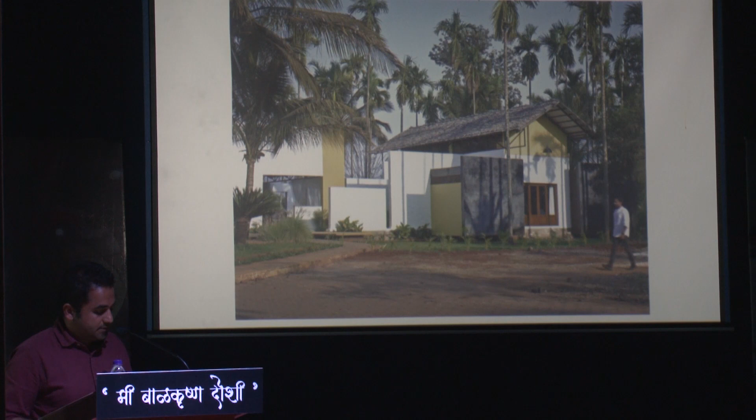The Desur house. The site, buffered by arecanut trees and sugarcane fields, harbors a weekend home that grows between what existed on the site. No trees were cut to accommodate the build. A part of the new design has sprung out of the plinth and walls of an existing old farmhouse that was already existing at the site and then was partly demolished to set in a new design language.

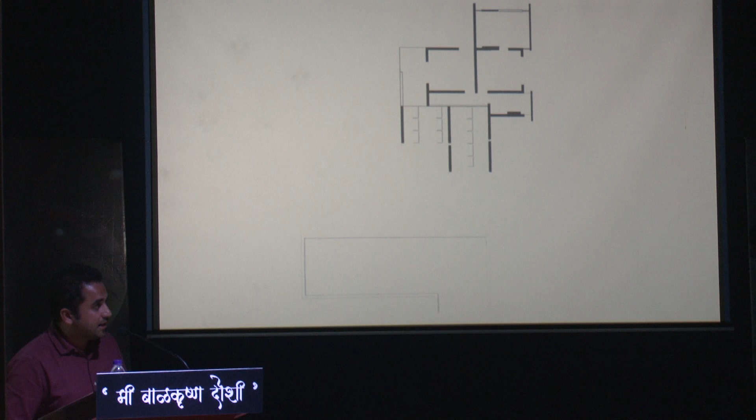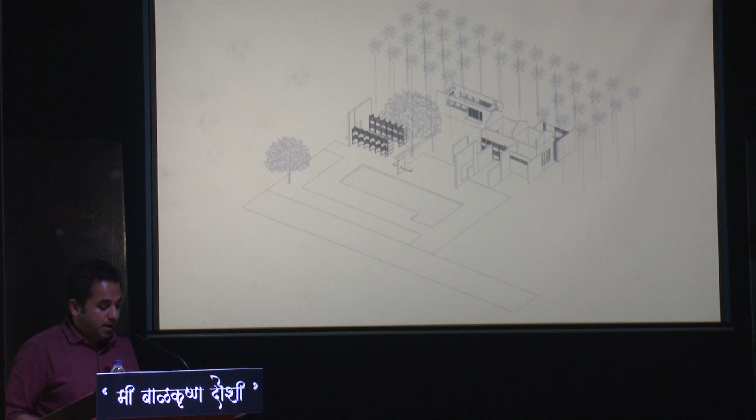Though the overall floor plan is choreographed in pure geometric spaces, the intent is to achieve a non-linear movement for the user. A set of rectangle floor plates are positioned as dining and living pavilions under a single roof form on either sides of an existing mango tree. A bar counter and a swing protrude out of the central beam, creating divisions between the living and the dining. All of this is mirrored in the black basalt pool.

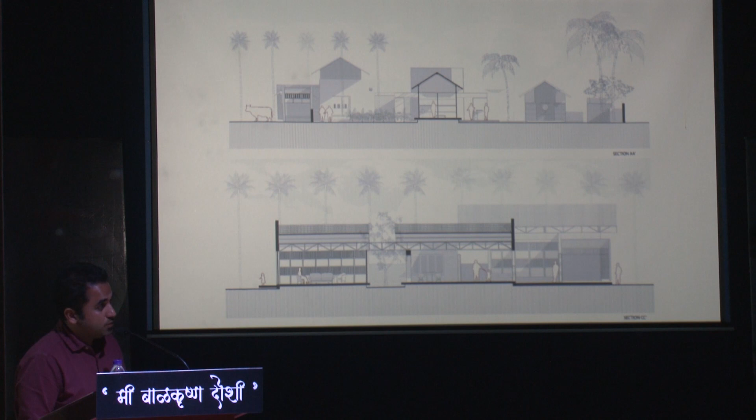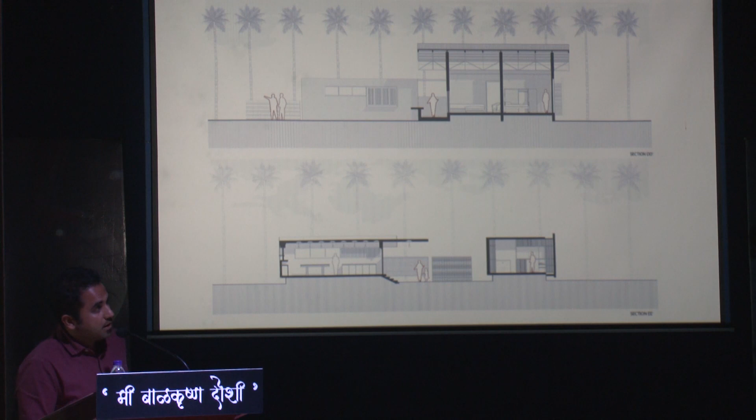A series of rectangle parallel walls are juxtaposed to form small courtyards that act as wide thresholds between the living areas and the bedroom areas. The occupants are transferred into a more restful region of the built form, which holds the bed, bath, and the toilet areas. Yet, this shift retains connections with the outdoors, as one can directly step out from every built space. The bedrooms have more defined corners in contrast to the less contained planning concept of the living spaces, giving qualities of privacy and security. The sudden change of spatial quality between the bedrooms and the courtyards is arbitrated by a screen passageway. All of this portion of the built form is built on the plinth of the old house.

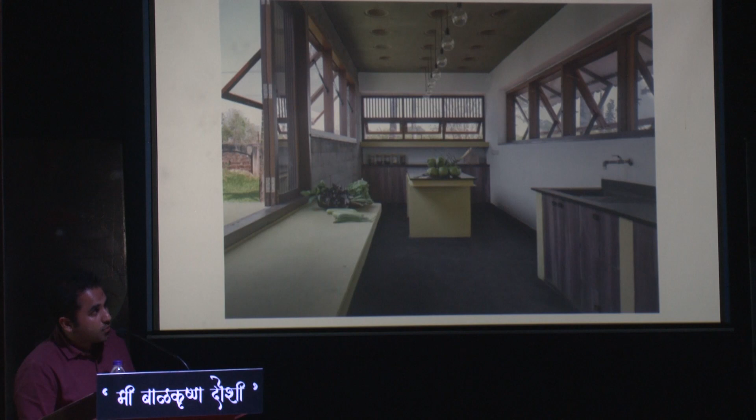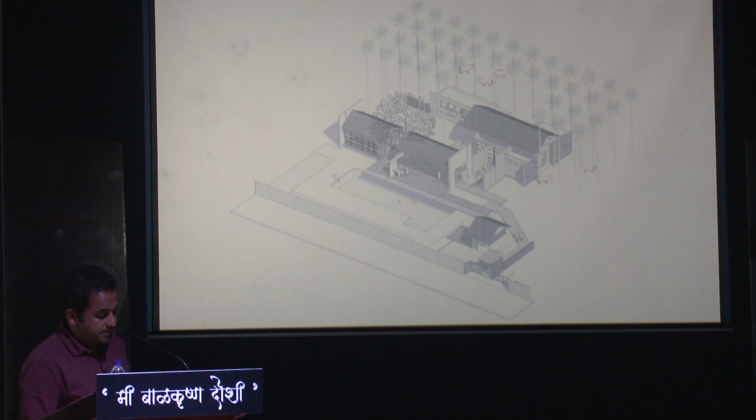Lastly, the kitchen block is designed with its independent filler slab. Placed in isolation, it has a community character than a pure domestic-driven kitchen. The kitchen has a direct dialogue with a courtyard garden in the front and a kitchen garden at the rear. Inspired from vernacular homes, it aims to recall this through colors, textures, materials, and spatial qualities. The wire-cut bricks, unplastered concrete filler slabs, kadapa flooring, black and yellow oxide treatments give it a vernacular home-like feel. The black basalt swimming pool is influenced by the basalt wells and ghats, vernacular to the architecture of Deccan Plateau.

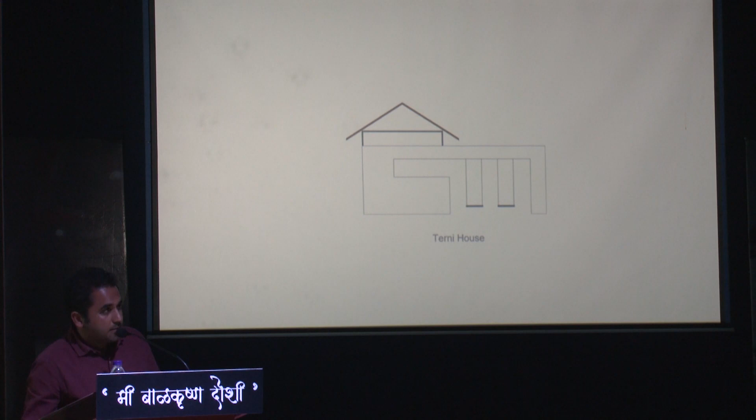Next, we have the Temi house. Like all village homes of this region, this piece of built form is basically divided into three parts. I won't get into the detailed plans, it's more of a narrative. One, dedicated to the daytime activities such as lounging, eating, cooking, and entertaining. A second space flanking along the swimming pool holds the bath and the restrooms. Lastly, an elevated space positioned right across these spaces holds a space for a good night's sleep.

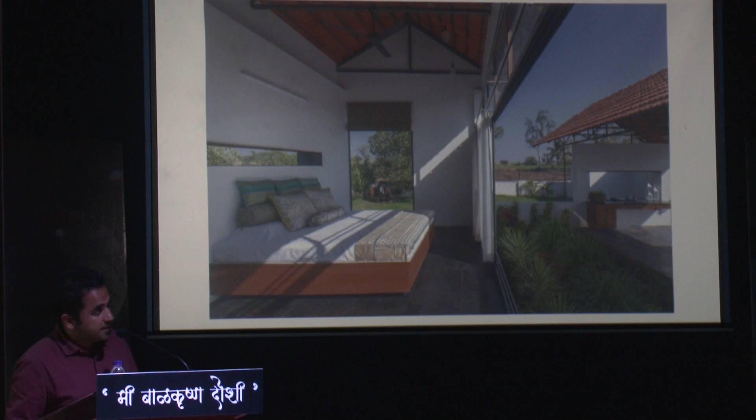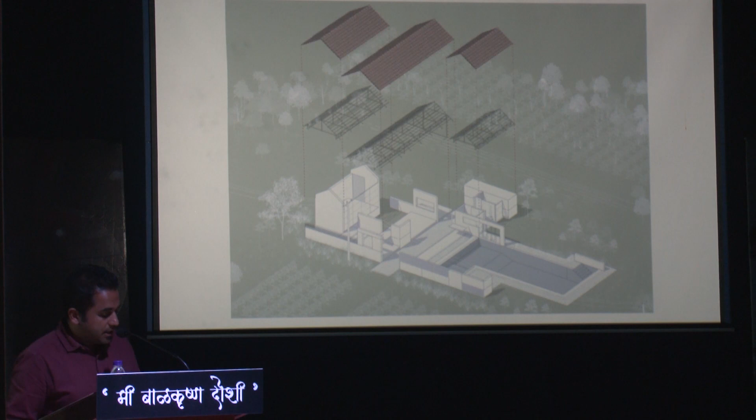Unlike a typical village home sheltered under a single gable roof, each of this space is sheltered by its own independent gable roof. Thus, the achieved image of the roof's silhouette reminds one of the neighboring village settlements.

These three units are spaced apart from each other such that the cantilevered gable ends of each roof slope down into the buffer areas that form softscapes and hardscape courts.

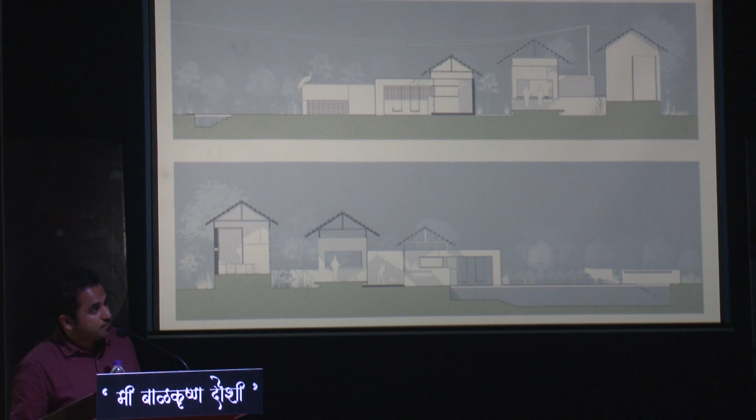The plinths and roofs of these three built spaces cascade down step by step towards the east, allowing all the spaces to enjoy the view of the swimming pool and the farmlands across, adding advantages of blocking the harsh south and west glare and directing the users towards more softer light of the north and the east.

The impact of this place was to set a different pace for its user, where they could get absorbed with the calmness and openness of the farm life. The immediate farms across this built space changed character seasonally, from being barren lands to being tall gardens of sugarcane fields.

Next, we have the Tulsigiri house. This is located around 20 kilometers from Bagalkot.

Nestled quietly amongst fields of sugarcane, this Bagalkot farmhouse draws inspiration from courtyard homes of North Karnataka. No stranger to its surroundings, this contemporary piece of architecture appears rooted comfortably in its place. A selection of warm colors and a style philosophy which bows to that of contemporary lines along with vernacular material palettes makes this farmhouse rather functional.

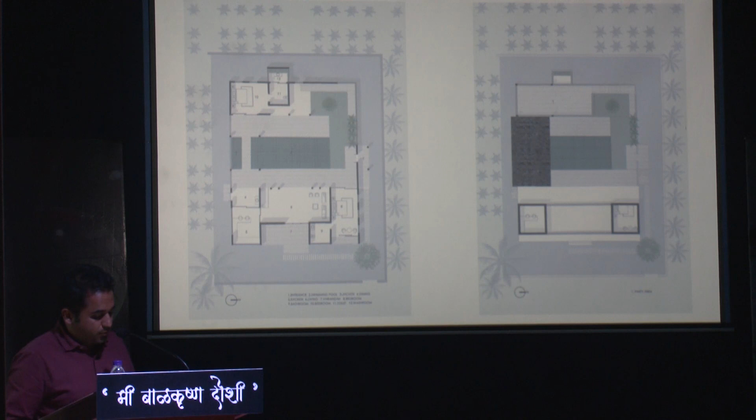The floor plan is developed with basic principles of Vastu. The house is fortified within the four corners of the built form, with a swimming pool taking the center stage under the central open-to-sky courtyard.

As with the rest of the farmhouse, the roofs and the walls are a nod to the local environment. Earthen clay roof pot tiles are unique in most contexts, but here it is as beautiful as it is common. As homage to the surrounding villages, these pot tiles undergo a process of natural charring that results in each pot tile having a distinct color, from grey, hazel, soot, to sand.

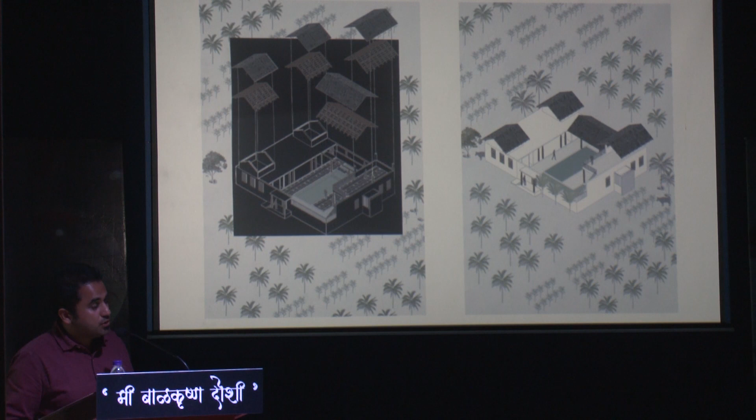These four roofs individually peak at different heights, mimicking the architecture of the neighborhood and creating a feel of community, as the roofs of a nearby village would. As for the walls, they are simply plastered white to mimic the rural lime plaster stucco.

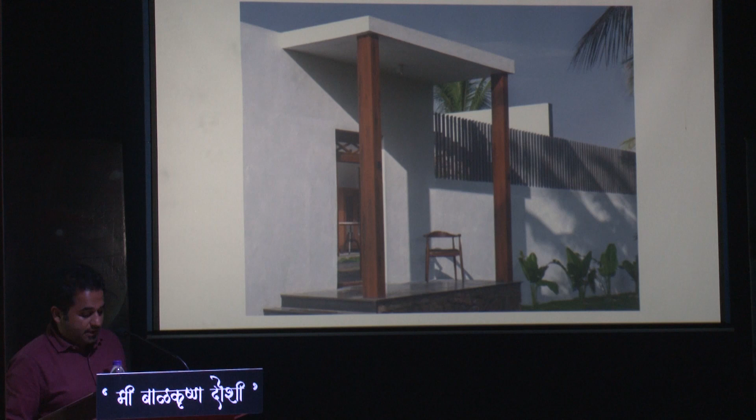The upper half of the periphery wall was dressed in numerous vertically placed slabs of kadapa, each at a degree of 45. This not only builds the character of the house, but also adds a method of ventilation while also adding a layer of privacy.

Further, this material is carried into most of the outdoor flooring. The same kadapa has been used, leather finished and laid out in a herringbone pattern. Shade spaces lead into each other effortlessly, encouraging a journey through the farmhouse, all while soaking in glimpses of the swimming pool.

References to South Indian royalty are seen in the interior tiling. Rich jade green shaded Athangudi tiles, which we got specially made from Athangudi in Tamil Nadu, are used for the shared spaces as well as the private spaces.

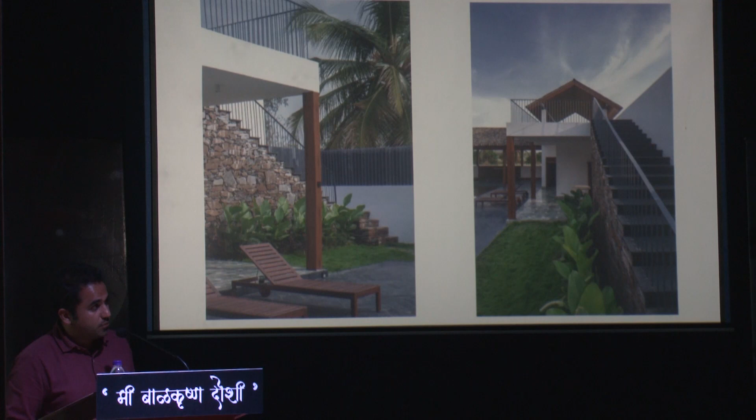Yet another key characteristic of the farmhouse is the use of random rubble masonry through parts of the exterior compound wall, and this has also been brought into the property to complement the backsplash wall of the jacuzzi and the feature staircase wall. These heavy stones were sourced locally, tying a tighter knot with the house and its surroundings.

All things considered, this Bagalkot farmhouse encompasses all that is required to make a beautiful home, with architecture that's in line with the client's first and foremost demand: an ode to the courtyard homes of the South. This is what we as architects have delivered, by crafting a midway between contemporary and vernacular schools of thought, with the design through choice of materials, forms, and spatial qualities.

In the quietude of tall grass stands solace, the Tulsigiri house.

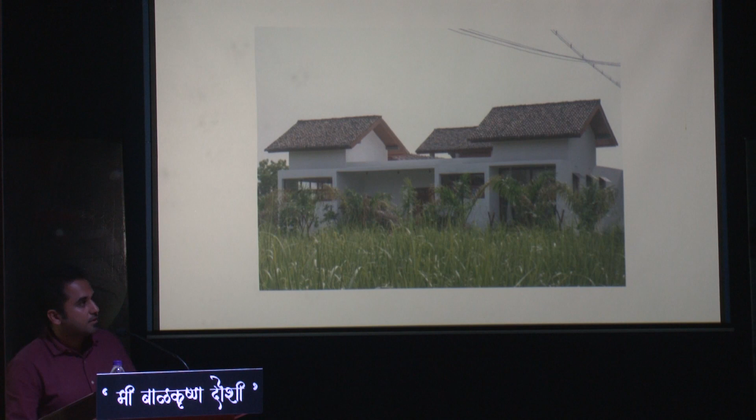Next, almost about 2 years ago, we came across a client in Bangalore who not only had us give a proposal for his residential design, but also got us another client, both in the neighborhood of Indiranagar, Bangalore. With no residential projects ever conceived by us, for all good reasons, the clients decided to hire us.

These two residences were incepted and completed at the same time. The alter ego of both the clients had one rule in common: no element of design between the two houses should be the same. So we fondly call these two houses the fraternal twins.

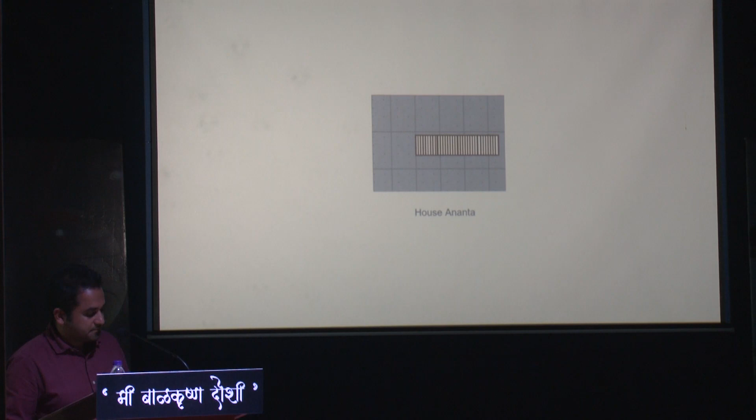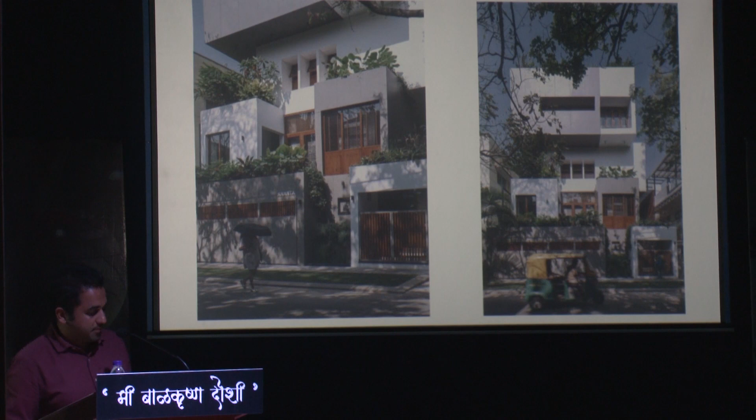House Ananta. Locked within its vastness and exalting bulk, soft brutalism calls to cubic architecture. This is House Ananta, a mass of laborious thought and inclusive design. Every aspect of this home has been created to maximize the interplay between light, forms, and pockets of green, a testament to the progress of garden-friendly residential design.

An assembly of cubes is organized in cantilevers and recesses that makes up the elevation of the residence. This give and take of exposed concrete, warm teak accents, and lush green foliage on the facades creates a captivating dialogue between the built environment and nature.

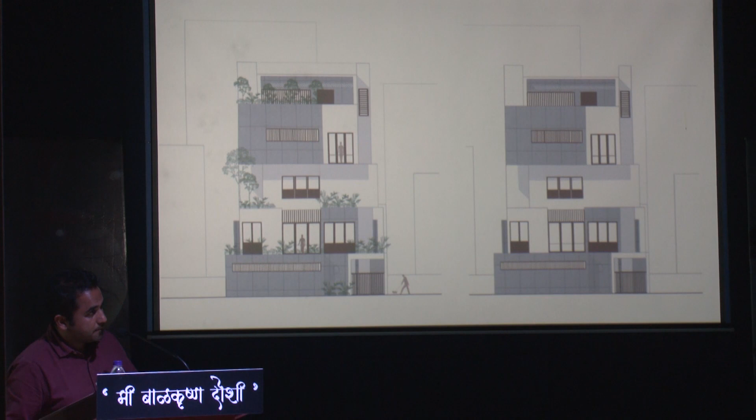The elevation almost narrates the metaphor of a stretched arm out to the park ahead. In fact, the client specifically bought this site because it faced a park ahead. It was a 40 by 60 site, and the main idea behind building this house was that he already has a house in the next lane, but that house didn't have gardens.

This new house was also 40 by 60, but again he wanted a lot of gardens. So we had no other space, because he had a list of royal programs that needed to be fitted into the built form.

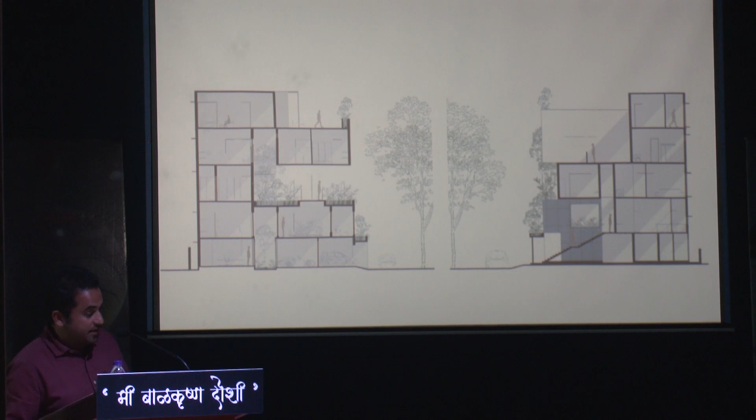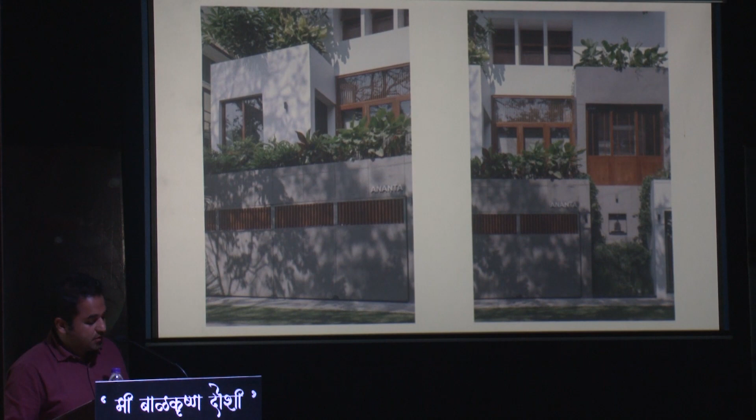So we had pockets of green that cascade all over the elevation of the house. These leafy pockets soften the sharp geometry of the building. The volumes are either finished in neo-cement concrete, painted white, or teak fenestrations. The facade calls for its visitor to stand and stare, a moment's pause before entrance.

I won't get into the detail of all the floor plans, but we'll just quickly brush through them. The house is built on a site measuring 40 feet by 60 feet, with amenities of a modern bungalow. The stilt floor accommodates the car parks, servant quarters, and a home office. An arrangement of a dog-leg staircase and a mechanical lift connects the house vertically.

The raised ground floor accommodates the living, dining, kitchen, guest bedroom, and an outdoor sit-out that constitutes the making of the elevation. The three bedrooms and walk-in wardrobes with their attached bathrooms are on the floors above, with a separate family room on the first floor and a home theater on the terrace on the second floor.

The garage is kept hidden behind a fortress of concrete and the warmth of wood. Facing the fleet of cars, the home office is trimmed in Rosso Corsa, an ode to the clan's prancing horse.

We'll just run through some of the interiors of this project.

In the heart of Bangalore's action, the cacophony of city life fades into a distant murmur. This is one of the views from the terrace looking down onto the street, where you see all the gardens on the east.

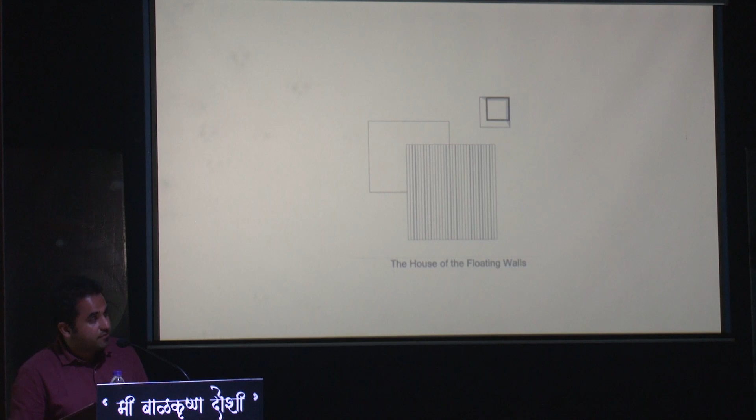Next, we have the house of the floating walls. In an age of architecture where minimalism isn't unfounded, the house of the floating walls solidifies its place amongst the rest. Shapes, spaces, forms are playfully painted upon a blank canvas, breathing life into this building.

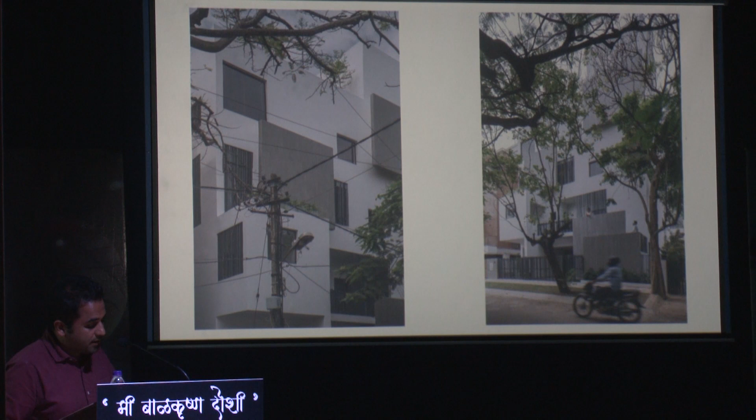The floating walls are crafted using varying patterns of vertical strokes. They mimic exposed concrete, while they are actually made out of thin-cut vitrified tiles with intricate workmanship. These, along with the fabricated louvers of assorted metal profiles, add to the minimalist composition of arrangement.

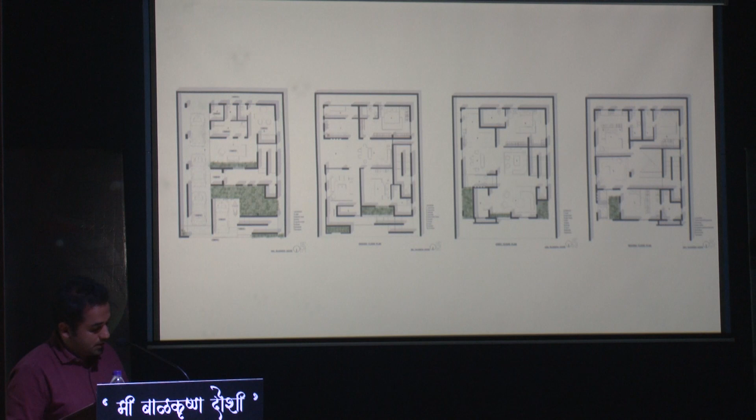The house is again built on a site measuring 40 feet by 60 feet. A 2BHK residence for rental accommodates itself on the ground floor. The ground floor is actually a 2BHK rental that the client has designed in a specific way.

He asked us to design another dog-leg staircase that would be accessed directly from the main road, without anyone entering the car park and the home office area for himself. The stilt floor is shared by the units, with amenities such as parking, servant quarters, and other services.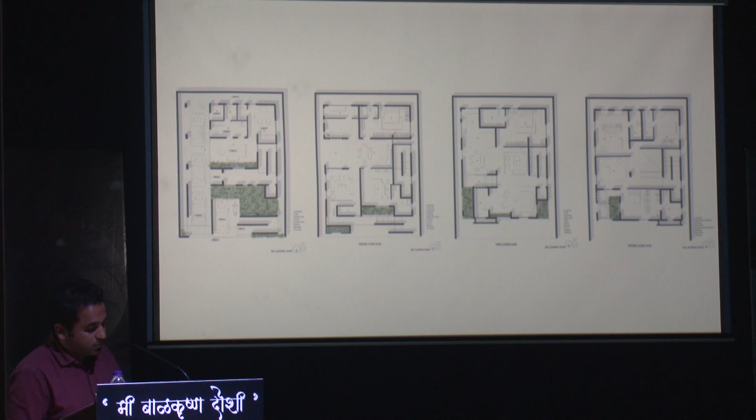The facade disguises a ground floor rental space, while the main house sits atop it. The entry to the rental residence is tucked behind these floating walls. A separate staircase and a lift connects the owners to the house above.

The house above is a duplex with a living room adjacent to a double-height family room, and an open dining kitchen and a master bedroom. The other three bedrooms are on the floors above.

Here are some of the interior images.

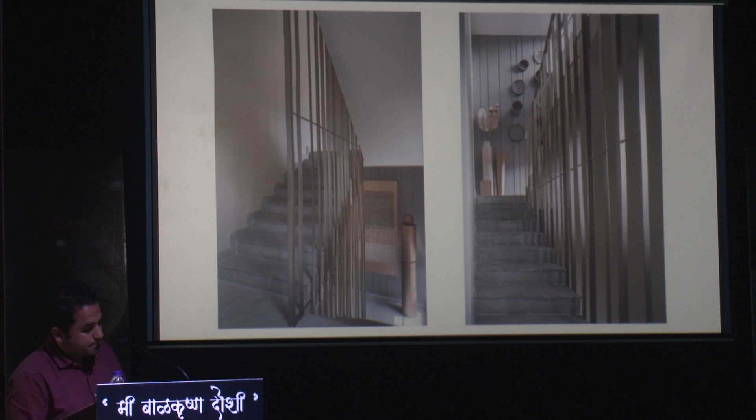Here in the house of the floating walls, more or less is more.

Back at our studio, we aim to integrate contemporary design forms with climate-responsive strategies. We indulge in celebrating our spaces with relevant colors, juxtaposed with a play of light and shadow that reflects the energy of an emerging young practice. Taking inspiration from Corbusier's quote, 'Color is an incredibly effective triggering tool. Color is the factor of our existence,' for our next two projects, we took liberties of overdosing the architecture with colors.

Here are two pre-primary school buildings located at Gokak and Nippani: the KLE Sanskriti Pre-Primary School at Gokak. Sanskriti School is an exclusive pre-primary school for an already existing school campus at Gokak.

The planning is directed by considering the psychological and physical needs of kindergarten kids who have tendencies of exploring spaces that have exciting avenues and colorful vistas with minimum boundaries. Their view of the outside world is repeatedly framed with circular windows.

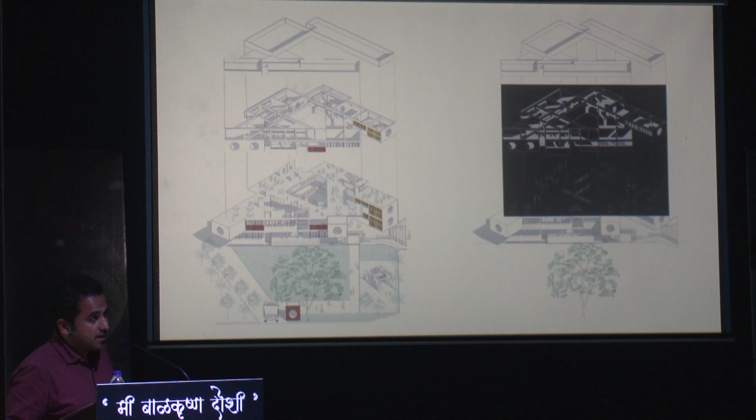A triangular shaped piece of land sandwiched between an existing school building on the north, a set of playgrounds on the east and west, and the campus property edge on the south was identified as the location of the new pre-primary school building. This new building would eventually craft the elevation of the entire campus as it stands in the foreground of the existing buildings, creating an avant-garde image for a school premises in the city of Gokak.

A semi-underground floor holds a large gathering space used as a dining hall, a kitchen and a store, and a large hand wash area.

The ground floor accommodates the center head and 3 nursery classrooms on the north. 4 LKG classrooms on the north and the northwest, and an activity room on the south, are part of the first floor.

Subsequently, 4 UKG classrooms and activity rooms on the south, with classrooms still positioned on the north, are part of the second floor. A vertical shaft with separate toilets for girls and boys runs through all the floors of the building.

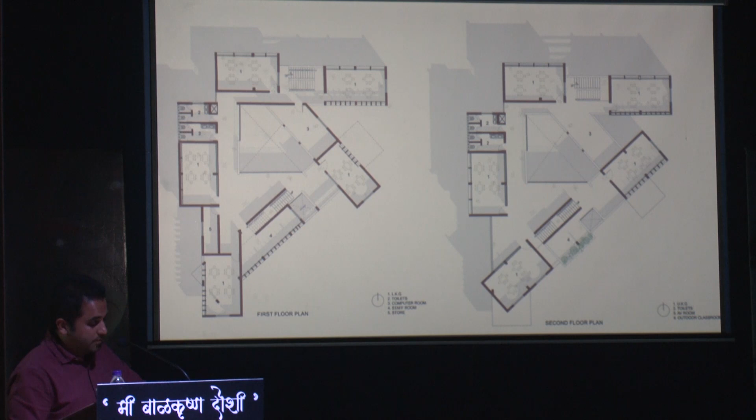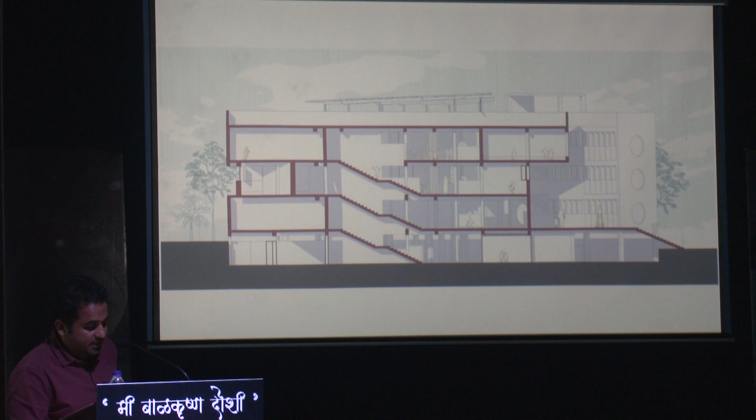For a pre-primary school, interesting attempts have been made through architectural methodologies to support various programs such as formal education, cultural events, and sports activities through all 4 levels of the built environment. Each activity has designated areas and is overlooked by the others through double-height courts, corridors, and window openings.

Certain climatic conditions play a key role for this building in Gokak, being a warm and arid city. The north, northeast, and northwest sides have been chosen to accommodate all the classrooms, such that their openings are free from the harsh glare.

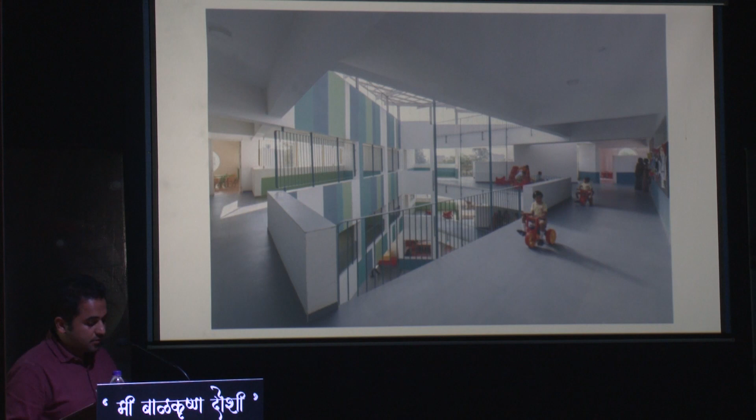All the activity spaces, the corridors, staircases, the admin room, the staff room, and the activity rooms are all placed on the south with brise soleils that buffer the vehicular traffic and the summer heat. A triple height court formed by the crossing of these spaces generates an effective stack effect that helps cool the temperatures, reducing the need for artificial cooling.

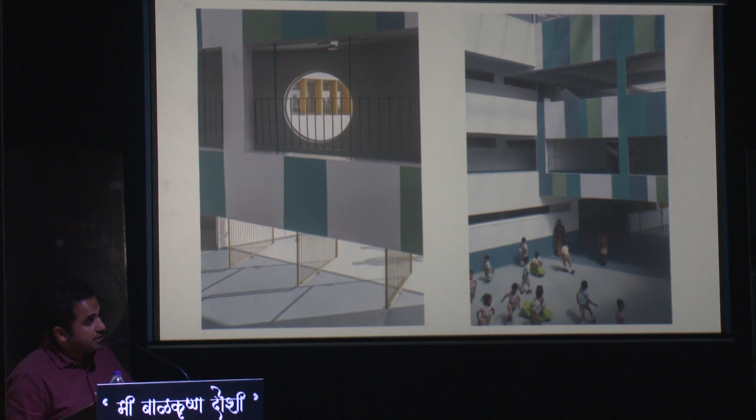The plinth level of the school is contoured according to the site context. A direct entry from the south is the primary entrance to the atrium and the basement below. An amphitheater on the east facing the playground acts as another stairway entry leading upwards, with a ramp running parallel to assist the disabled.

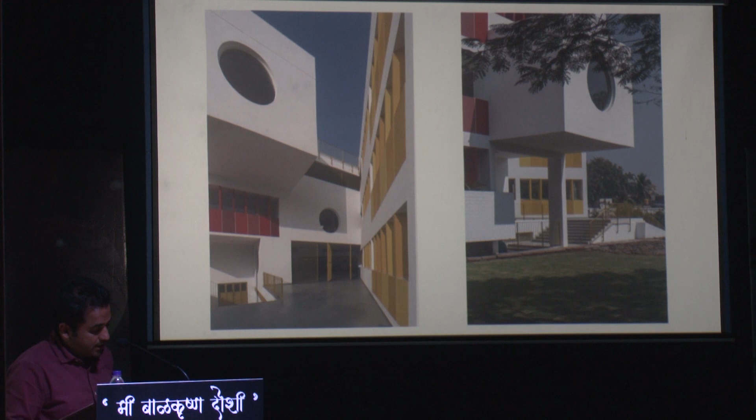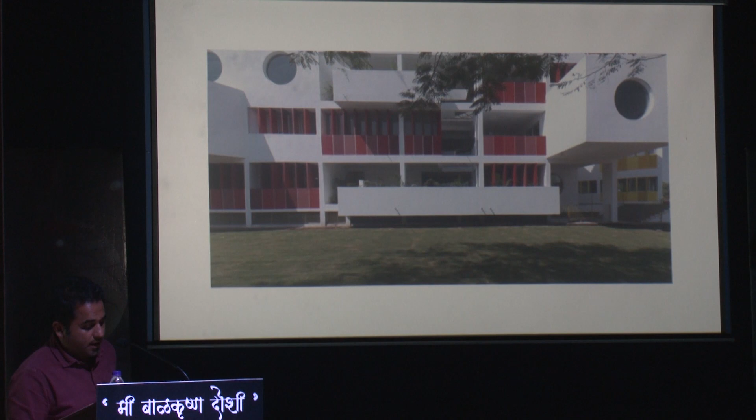The architectural language of openness, continuity, security, vibrancy, and unity is choreographed throughout by the positioning of courtyards, classrooms, and double-height spaces which connect the students across all grades. The circular windows and the colorful brise soleils in shades of yellow are a metaphor to the childlike and energetic nature of the kindergarten kids.

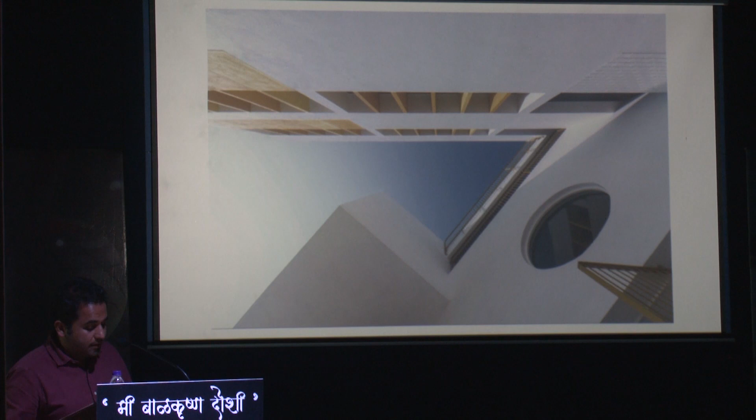This celebration of architectural features runs in and out of the building, framing the indoors and outdoors through these fancy fenestrations. The massing of the built form is blossomed by stacking rows of classrooms within the 3 sides of the plot.

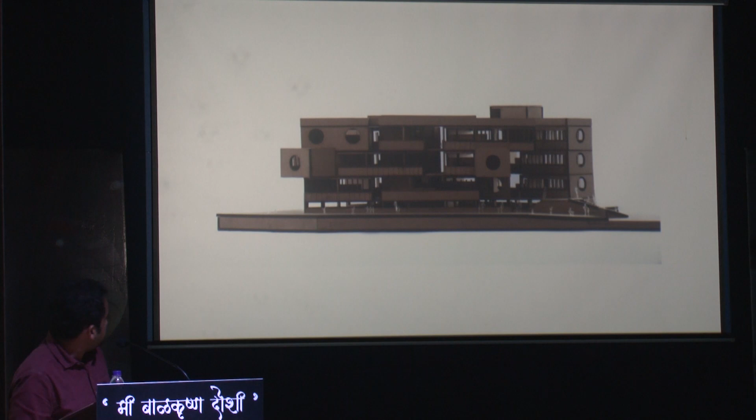This is a model that we completed after the design was approved for construction.

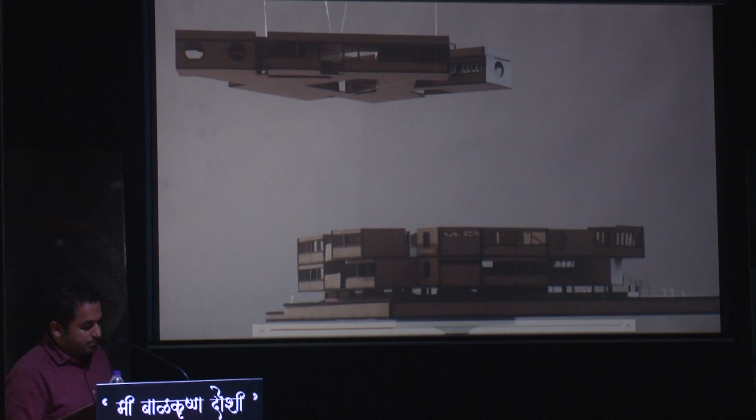With a rhythmic twist and turn of these blocks, a volume of cubes jutting out at perpendicular and angular degrees assists in creating a simple yet powerful architectural volume.

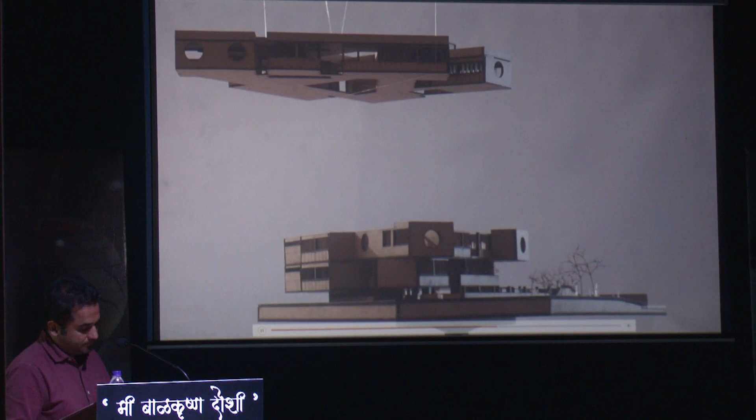Next, we have the Nipani school. This is also a pre-primary school.

A square with a triangular top hat does make a home. A similar approach has been taken in sketching this school. Built like a toy house, the massing has been designed with certain innocence in its rather rudimentary shapes. Forms of playful construction in projected cantilevers make the elevation of the school block.

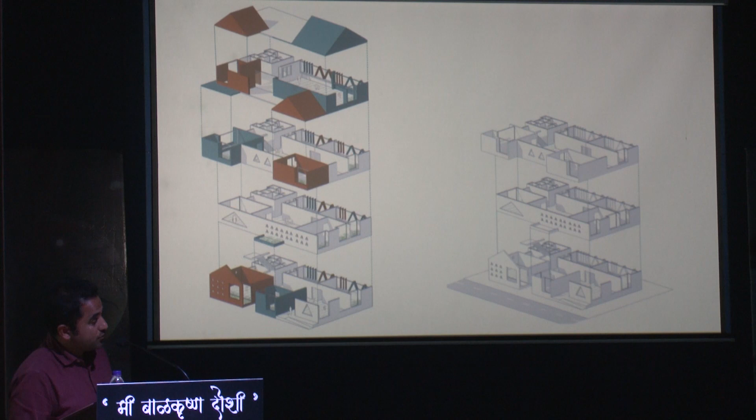A dual entrance on the south - there's one here and there's another one there - allows for the movement of the usual traffic, while a sloped entrance leads directly into the playgroup area. Both accesses are monitored by the centrally positioned principal's cabin.

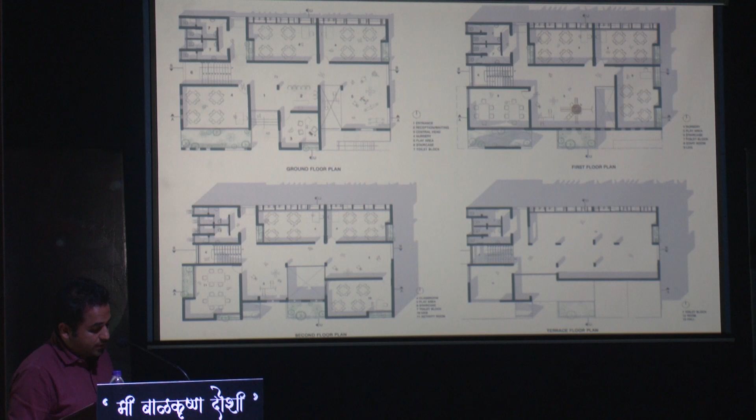Each floor hosts 3 classrooms, an activity room, and separate washrooms. The nursery activity room is fitted with a floor-to-ceiling window casement to maximize natural illumination of the volume. A shaded court across this space encourages learning amidst nature.

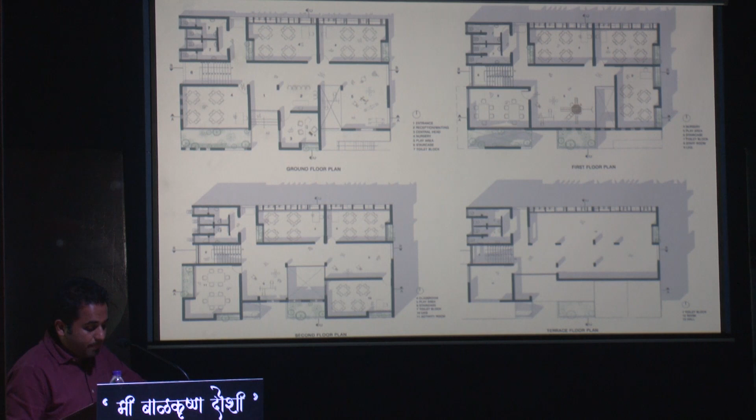Additional play areas on each floor ensure that students are constantly engaging with their cognition, while also continuously developing physical, emotional, and social well-being.

A space designed by the drive of climate responsiveness is again a very essential criteria, made possible with architecture responsive to stack effects, classrooms oriented to north light and cross ventilation, and spaces that impart an atmosphere of learning, reflection, and sensitivity. This project is under construction.

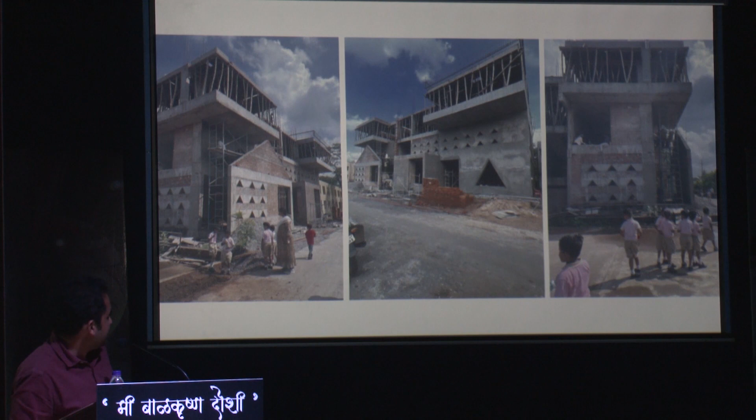These are the recent site images. There's an existing pre-primary school opposite to this site, so the kids get to see their school getting completed.

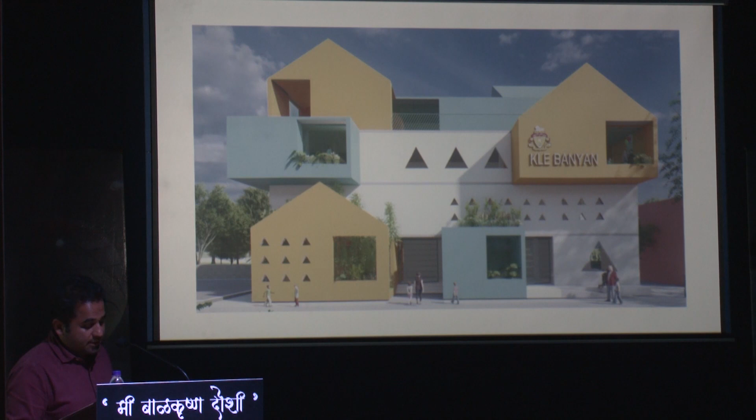This is a render of the final outcome. The school block is shaded in tones of white, cheddar, and deep cane. Designed with care, Sanskriti's architecture embraces a playful ambience that sparks joy and ignites curiosity in every child.

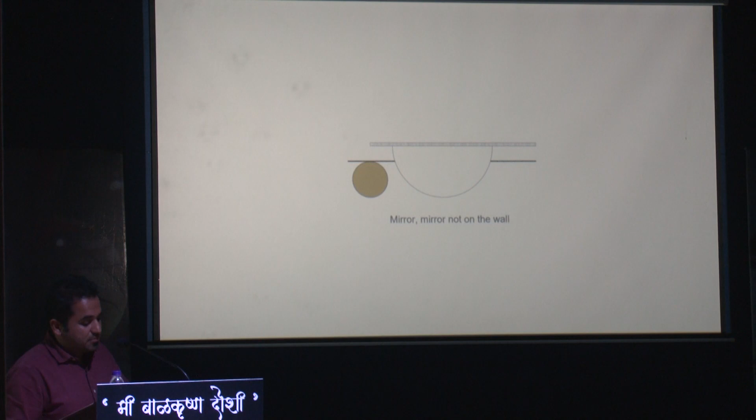We recently completed an interior project for a salon and a spa back in Belgaum. We call it Mirror, Mirror, Not on the Wall. Deepak's, a unisex salon, needed a space that would blend in both feminine and masculine notions of form, material, and mood.

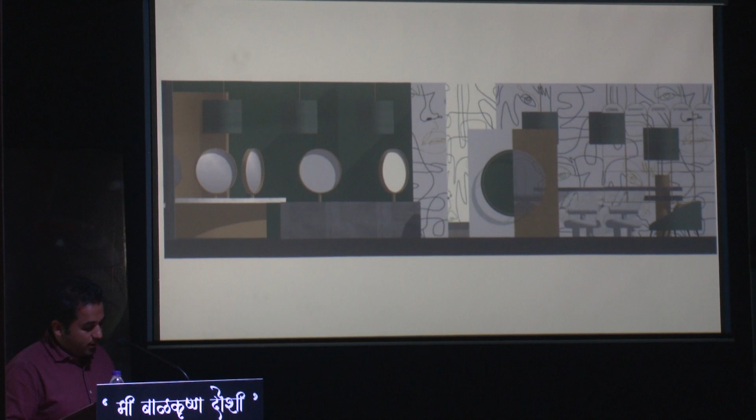One enters the parlor through a statement door, welcomed by a reception area. This space overlooks the working area, and the two seamlessly flow into each other. The reception area is confronted with customized loungers and chairs that complement the shapes and shades of the entire design. The hand-painted wall art is an abstraction of human body parts that metaphorically celebrate the beautification of the human body, apt for a salon.

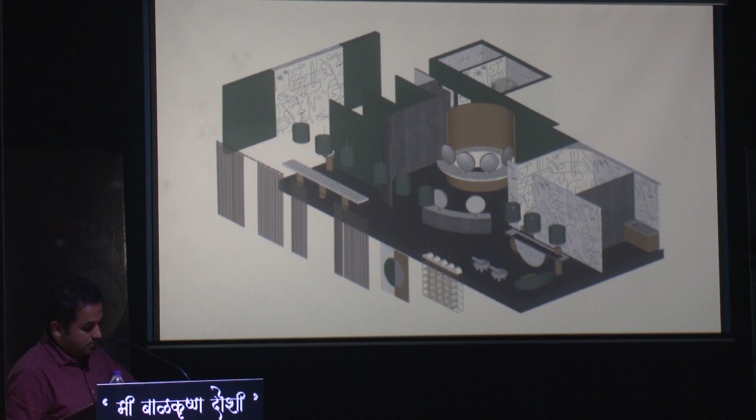So these are the details. This is a detailed drawing of all that went into making all the furniture of this interior design project. On the inner core, we have plywood faced with a vitrified Statuario tile. Certain places we have MDF finished with an arched concrete of Asian, and we also have some bronze gold paint. We have fabrics for the lampshades.

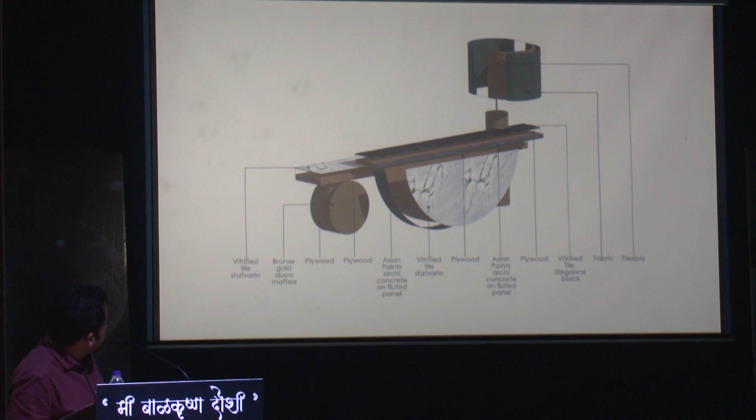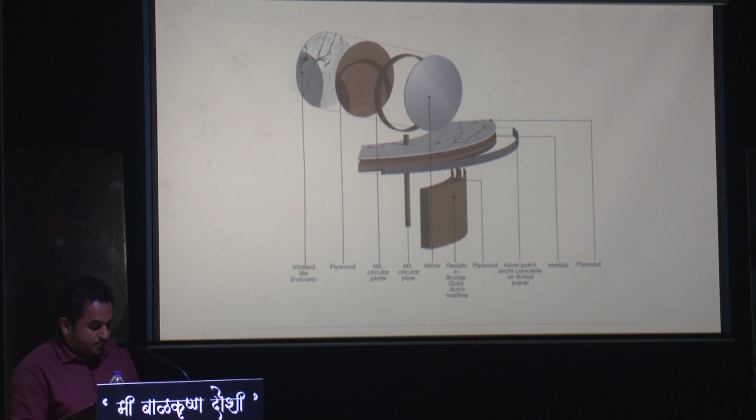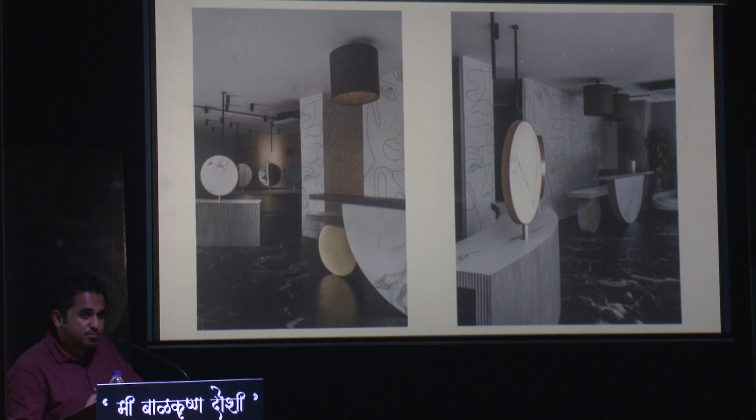The arrangement of circular mirrors throughout this space creates dramatic reflections of the interiors. People and spaces are framed into the mirrors randomly, creating abstract scenes, giving the space more avenues than it has.

A bold and beautiful setting of colors and materials is thoughtfully played throughout the interiors, the furniture, the upholstery, and the softscape with planters. With black-bodied vitrified tiles having strokes of gold and grey juxtaposed with fluted concrete panels and jade green walls, embellished with gold-rimmed circular mirrors, bespoke wall art, and designer lampshades.

This salon has complemented the stature of the 20-year-old establishment of Deepak's Salon, shaping it further to ornament itself for an upmarket luxury salon brand in a Tier 2 city, Belgaum.

Back at our studio, we have a few charity projects that we are involved with. We have one of them that we are presenting here. It is the Muni Vihar.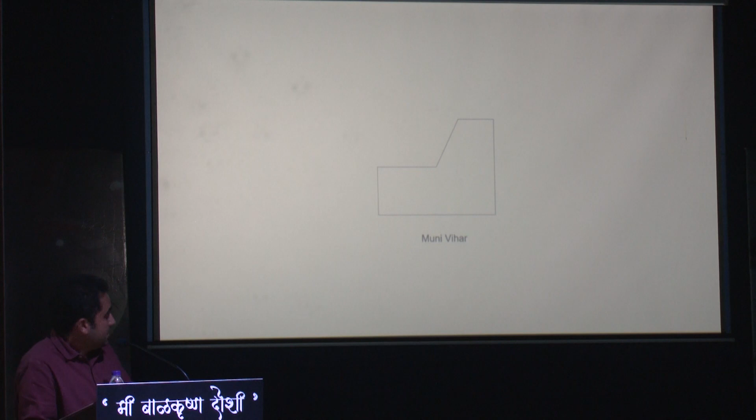The Muni Vihar project is a resting place for Jain ascetics, Jain monks and nuns, and pilgrims who have chosen to walk this path. Jain monks firmly believe in non-violence and minimalism, with an emphasis on self-discipline, meditation, and ascetic life, which have been the guiding principles for the design of this project.

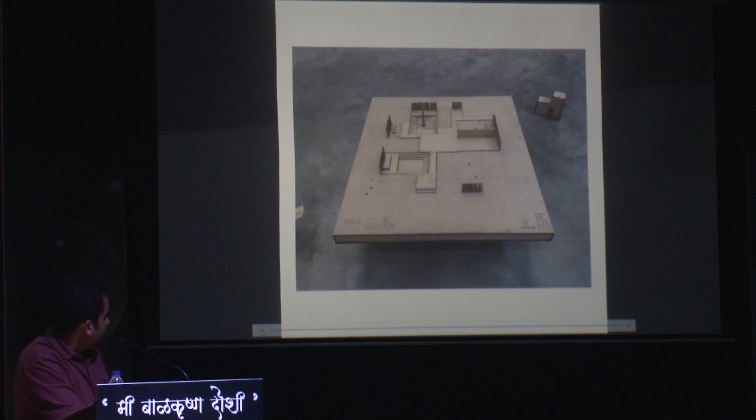Here is a model of this project.

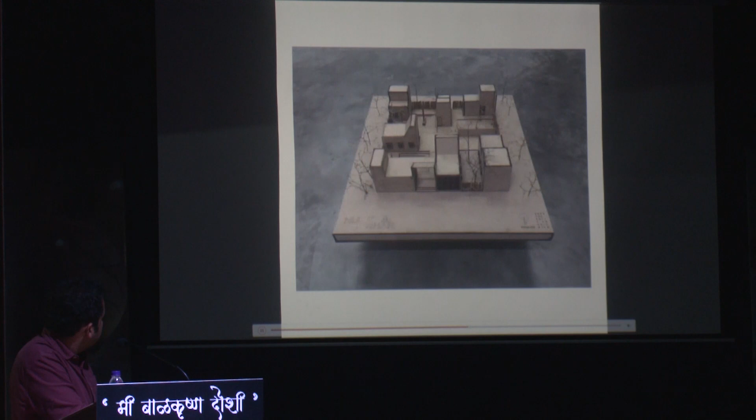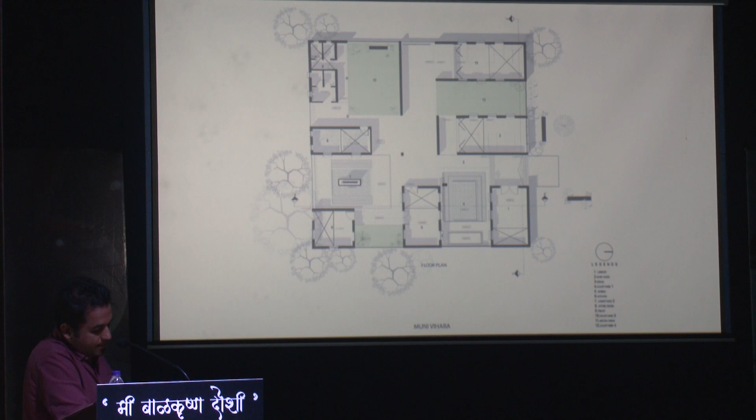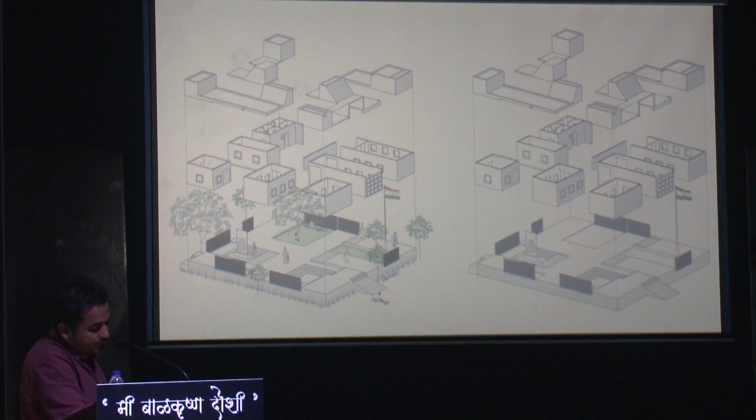The planning is conceptualized over the shape of an ancient Jain symbol, the swastika, with basic principles of Vastu Shastra, and with multiple courtyards curated for teaching religious, cultural, and social gatherings, it incorporates an open planning philosophy catering to multitudes of spatial usage.

This project is just in its final completion stage, and it's opening next month. The project is charity in nature, which began with no funds. With a proposed design and a group of devoted committee members, the construction developed in parts over 3 years, as donations met. The project is now in its last leg of completion, but it has been in use for religious teachings for students of an adjacent Jain school.

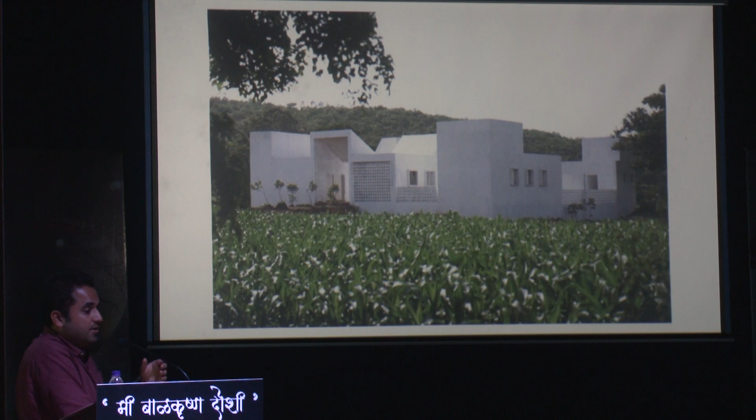We happened to visit this project last week, and there are a few images that we shot while the students are using these spaces for their morning pathshalas.

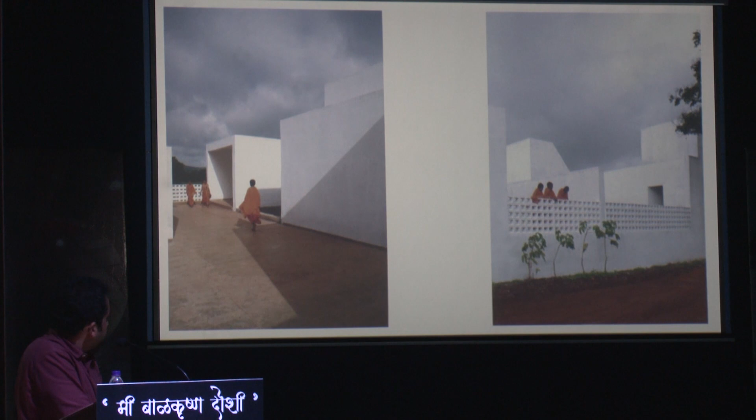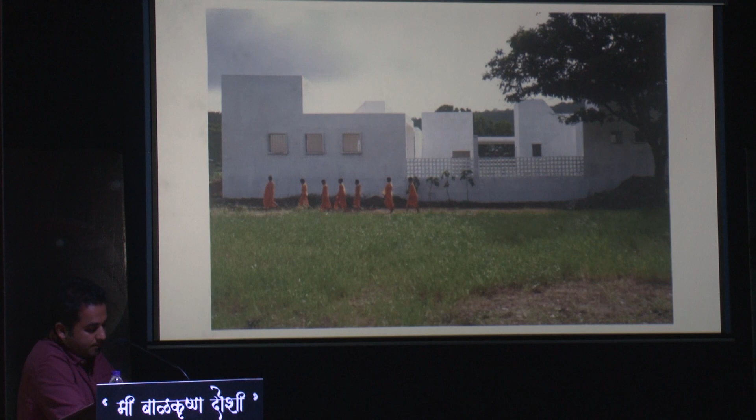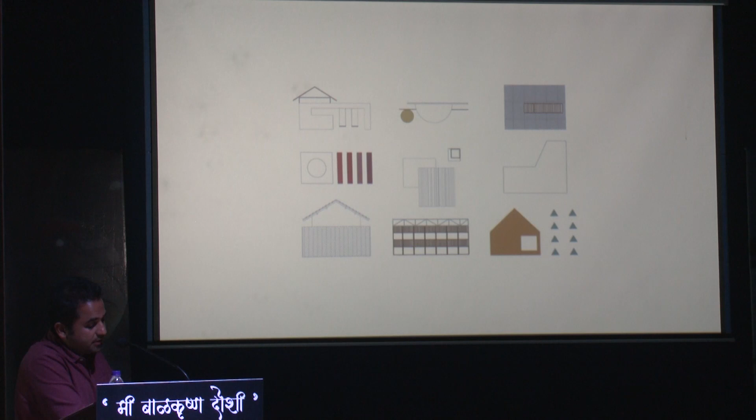In a constantly evolving field such as architecture, it is challenging to pick a design language that defines our practice. But we rather look onward to formulating our designs that would eventually create a niche for itself with an ever-evolving creative ethos.

We are just one among many young practices in the country, and I feel immense gratitude and faith that Girish sir and the team at Road have shown in having us for such a special event. Thank you.

Thank you. Thank you, Shreyas. That was an amazing presentation.